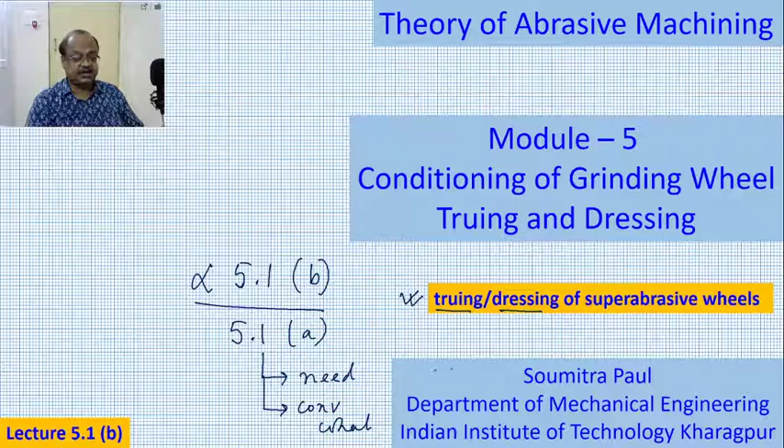In this particular 5.1b, we will be talking about truing and dressing of super abrasive wheel. Before we start, one thing I need to mention is that truing and dressing of super abrasive wheel is much more difficult and much more expensive, and that is one of the reasons the industry is trying to go in some other direction, which we have discussed earlier, but today it will reinforce the idea given to you earlier. So let us see how super abrasive wheels are trued or dressed.

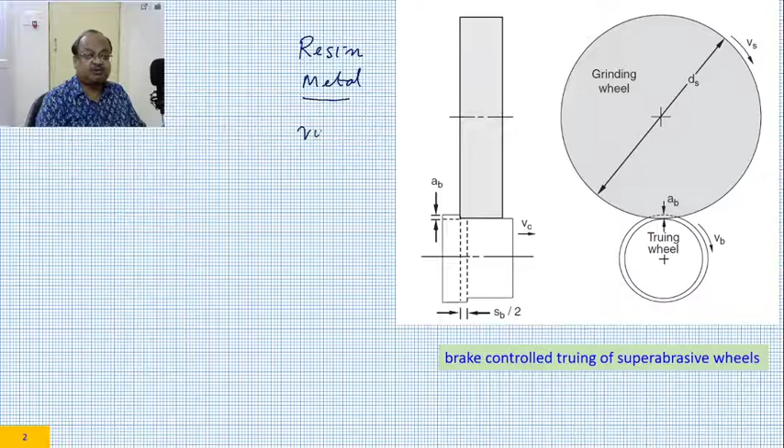Super abrasive wheels are typically resin bonded or metal bonded. However, you also have vitrified bonded only CBN wheel. So when we discuss typically super abrasive wheel, we will assume they are resin bonded. This is your grinding wheel and this is the truing wheel, typically silicon carbide wheel, and this is a sacrificial wheel.

During truing or dressing, gradually this diameter would go away, would reduce. So what is happening? This is rotating at Ns. This is not positively driven, meaning it is not mounted on any motor. This is simply mounted on a spindle. So as you go on doing the dressing operation, this is frictionally driven.

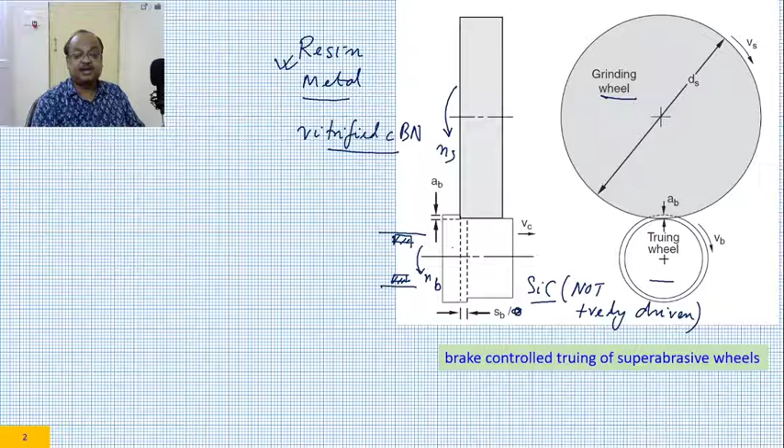However, on this side there is a centrifugal brake. So as the rotational speed of this brake controlled spindle increases, the centrifugal brake will enlarge and clamp on the brake shoe, and this VB and VS would not be the same. So there would be a slip velocity, and because of that slip velocity, there would be truing action or cutting action imparted by silicon carbide on this.

This silicon carbide would not be able to machine the diamond grits. What it would be able to machine is the resin bond or the metal bond, and by machining the bonds, it will try to remove the eccentricity. It will not do anything to the grits. The grits will become loose, the eccentric portion, and it will come out. So this is called brake controlled truing device of a super abrasive wheel.

These brake control truing devices are rather expensive. You have to have a silicon carbide wheel whose diameter goes on reducing very fast. So this process is time consuming and expensive. Let us see a video of brake control dressing.

So as you can see, I'll explain it. First, let us have a look at the video. The video is rather short.

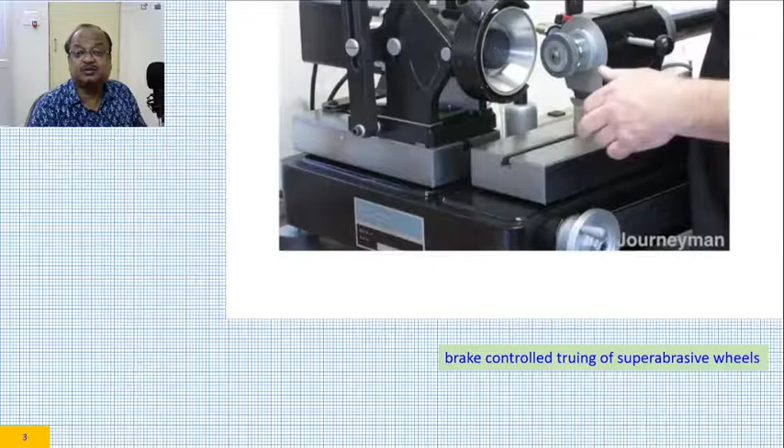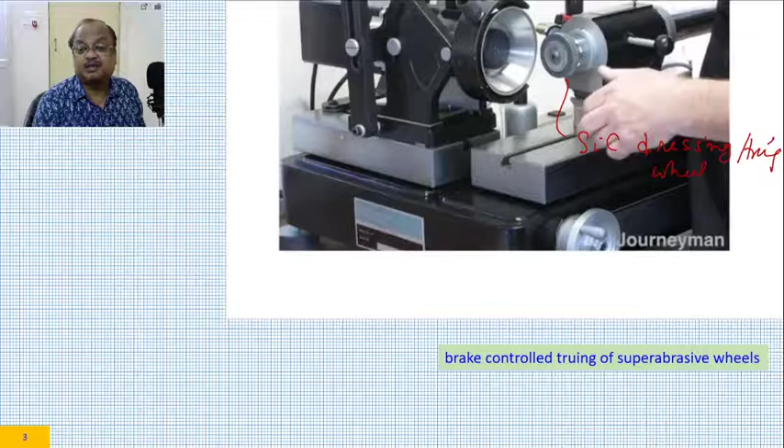At this stage, it is better to annotate. So this particular one is your silicon carbide dressing or truing wheel. This is mounted on this spindle. This spindle is not driven by a motor. Rather, the spindle is mounted on a centrifugal brake. We are truing the face of a grinding wheel.

This is the grinding wheel which is rotating in this particular direction. This is not rotating. When this is in touch, this rotates by friction drive and there is a brake control. So VS and VB would not be same. There would be a slip velocity.

Other than that, this has to be given a feed in this direction and it has to be reciprocated in this direction. So from this handle, this feed can be given and there is another handle with which this reciprocation can be given. In this way, the face of a grinding wheel, this is showing a face being trued.

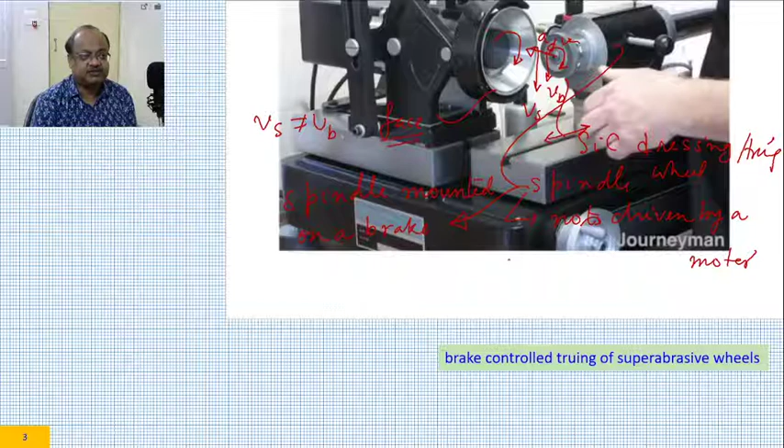Even the periphery of a grinding wheel can be trued. So this is a diamond wheel, possibly a metal bonded diamond wheel, which is being brake control trued, but it is not the periphery of the wheel, it is a face because it is a cup type grinding wheel.

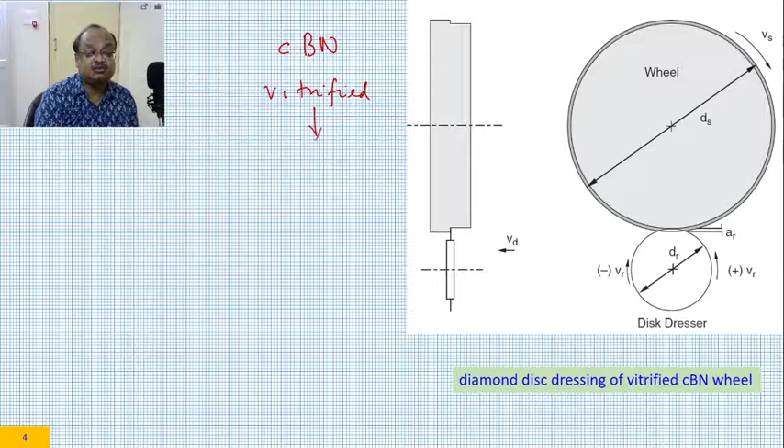What is the other? This is a particular dressing technique which is for CBN wheel. This CBN wheel is vitrified bonded. Vitrified bonded CBN wheels are rather easy to dress and that's the reason they are becoming popular. They are dressed with a diamond disc dresser.

This is the diamond disc dresser. This diamond disc dresser is positively driven. That means they are not frictionally driven. It is driven by a motor.

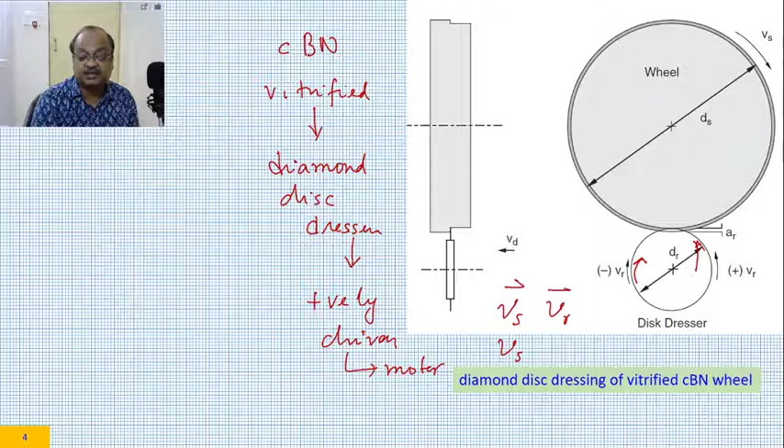And because it is driven by a motor, it can be either driven in this direction where Vs vector and Vr vector oppose, or it can be driven in this particular direction where the Vs vector and Vr vector are in the same direction. So this can be done, and there has to be a slip velocity which would enable truing and dressing.

This is the engagement. So this is Ar and this is moving in this direction with a lead of Sd, which will give rise to a velocity of Vd. And this Sd, please remember, is millimeter per revolution of the grinding wheel. It has got nothing to do with the speed of the dressing disc. So in this way, this kinematics is very similar to traverse cylindrical grinding, if you recall.

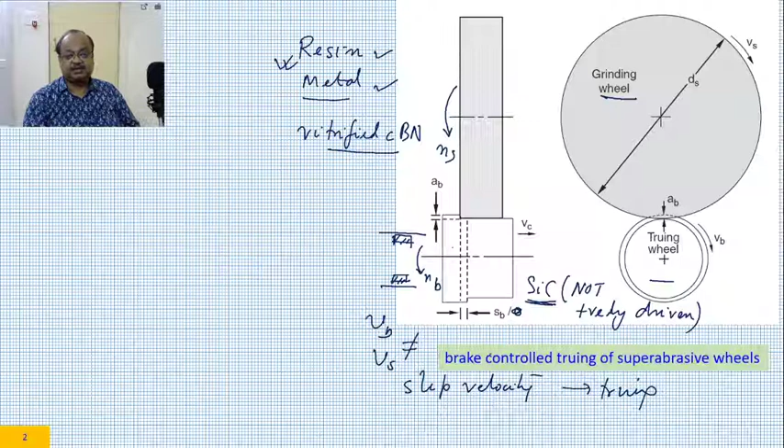So this is used. Now let us have a look at another one where dressing or truing of diamond wheel is done by a driven silicon carbide wheel. If we go back, this was not a driven wheel, this was brake controlled. This was the video of brake controlled dressing technique.

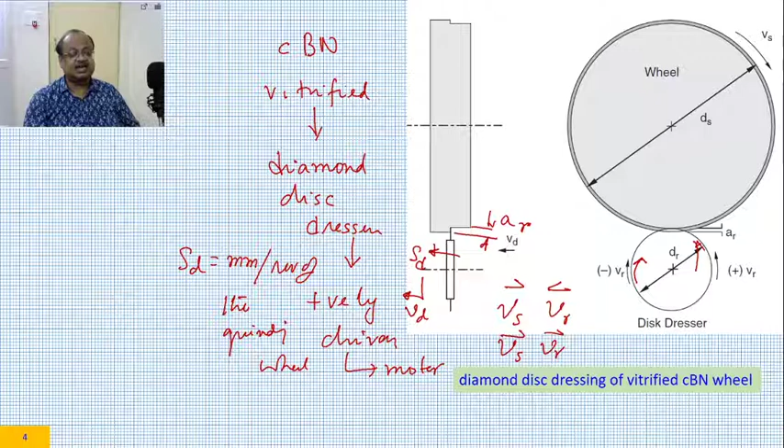This is a driven dressing technique of vitrified CBN using a diamond disc. However, diamond grinding wheels can also be dressed using driven wheels, but in that particular case, driven wheels or dressers are rotary silicon carbide wheels and they are sacrificed for dressing or truing the diamond wheel. Let us have a look at the video.

So this is dressing of a diamond wheel with a driven silicon carbide dressing wheel. This is once again a face truing operation.

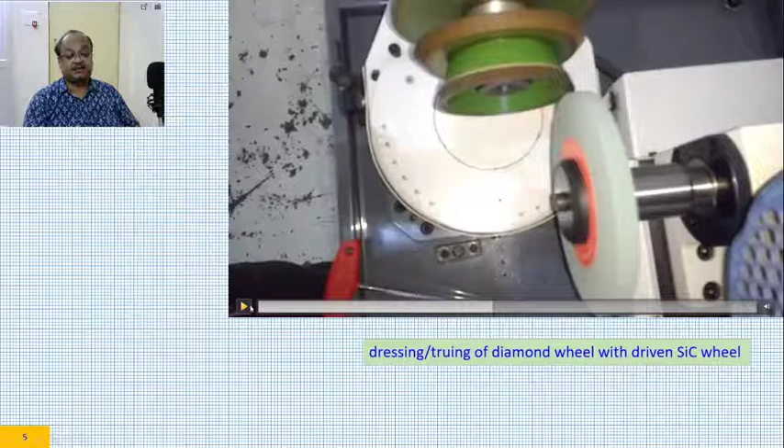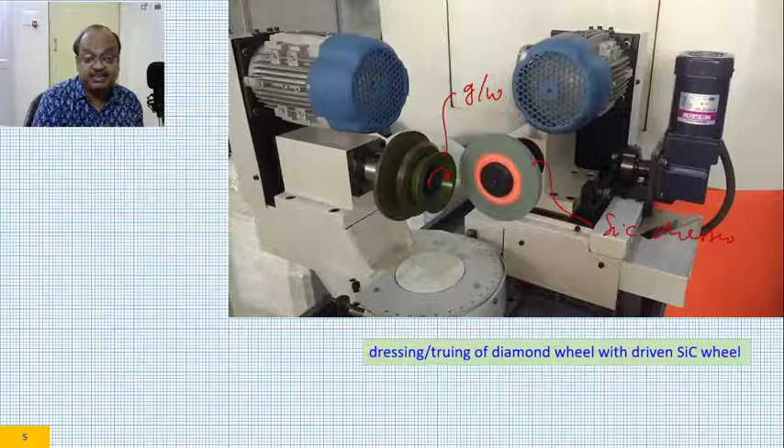Please look at the motions. What are the motions here? Let us annotate, then you will be able to see. This is the grinding wheel, and this is the silicon carbide dresser. This grinding wheel is rotating in this direction. This is being driven by motor 1, the dresser. The grinding wheel is driven by motor 2. So it can be driven either in this direction or that direction. This is NS, this is NR, the rotary motion of the dresser.

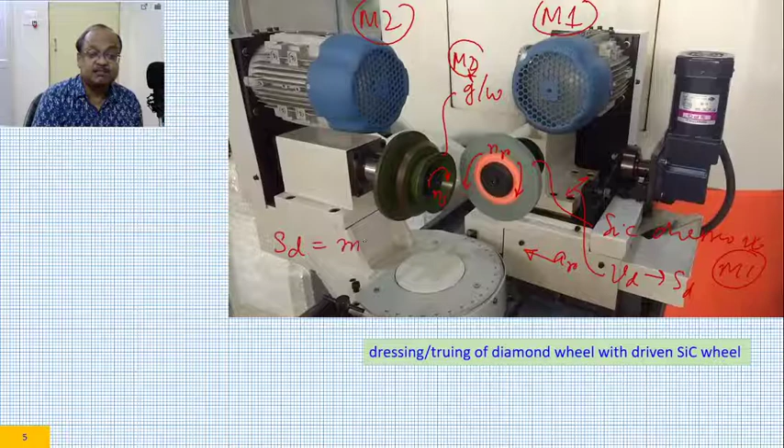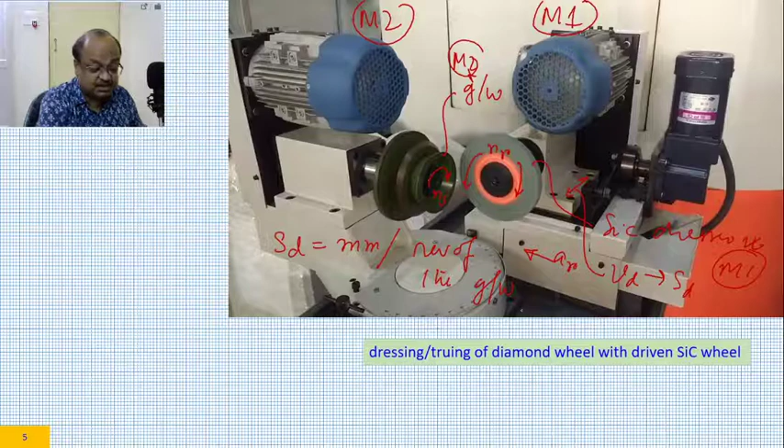Furthermore, this table can reciprocate, and this table can be fed in this direction to give AR. This reciprocation will give VD, which will lead to SD. Once again, SD is millimeter lead per revolution of the grinding wheel, not the dresser. That must be understood. So this is one way where dressing and truing of a diamond wheel is being done with a driven silicon carbide wheel. Driven means it is positively driven by a motor.

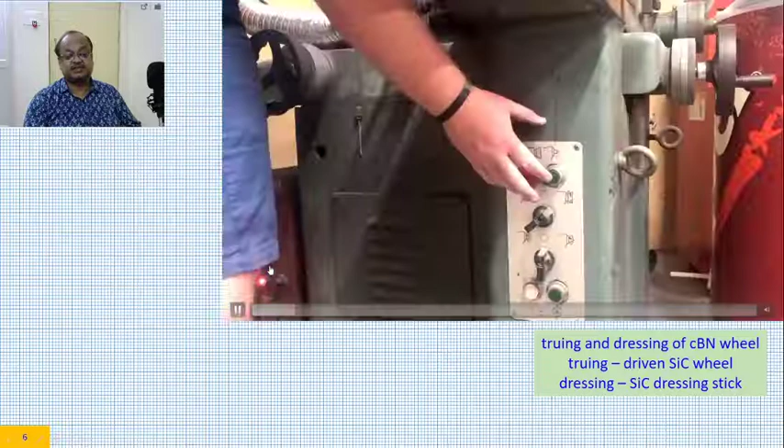So truing is being done with a driven silicon carbide wheel, very similar to the previous one. This video is coming from another source. So he is starting the motor, and you can see two wheels. One is a dresser, another is the grinding wheel. I think I will stop it here.

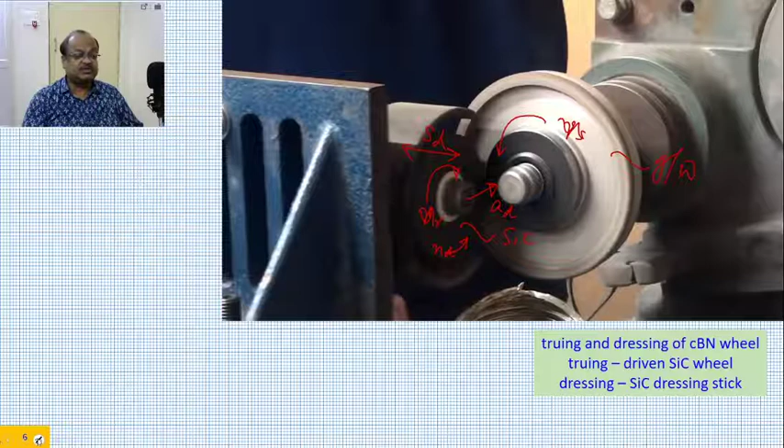Yeah, and I'll annotate a bit. So this is your grinding wheel, this is your silicon carbide dresser. This is rotating in this direction, this is rotating in this direction. This was reciprocating, and there must have been an AD in this direction. So this is SD, this is AD, this is VS, NS, NR, and this NR could have been in the other direction as well - that possibility was also there. I do not know how to get rid of this annotation. Erase all, then we can go back to the video and have a look.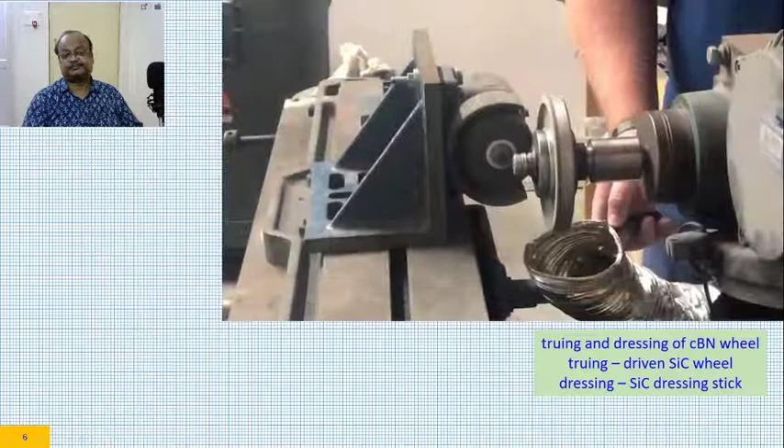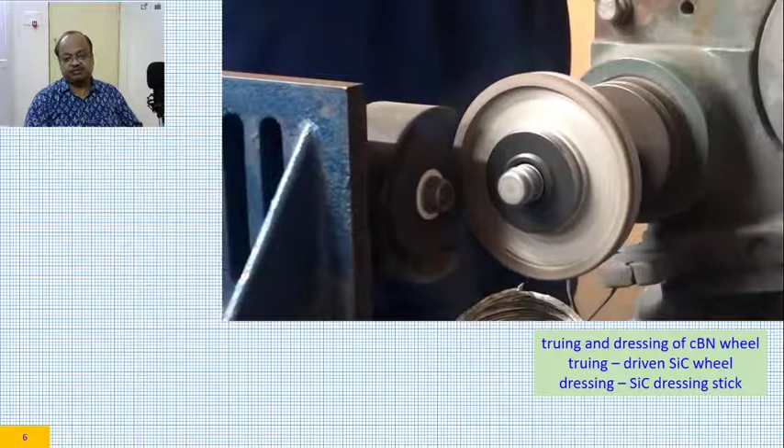So he is not dressing, he is truing it, and after that the dressing will come. During this truing process, the dust coming out is not much, and this is what I am calling glazing. After this truing, as you can see, the grinding grits are no longer protruded enough to participate in the cutting operation. So dressing has to be done so that it becomes open. Let us continue - so this is a glazed wheel, what we call a glazed wheel.

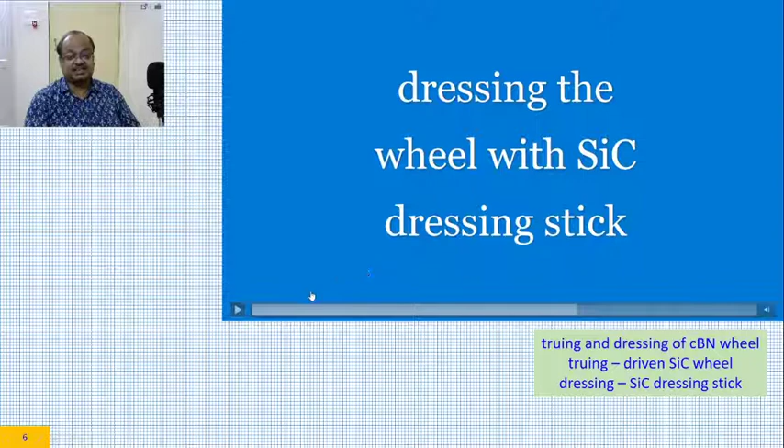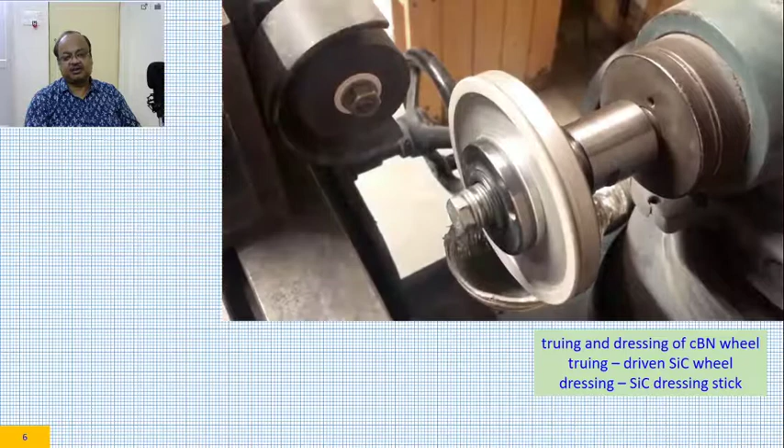So now it is dressing of the CBN wheel with a silicon carbide dressing stick. They are using a dressing stick for doing this. Several passes are required. This is the silicon carbide dressing stick that he is holding with his hand and rubbing against this so that he can eat away the bond material, and gradually the grits are exposed and it becomes sharp.

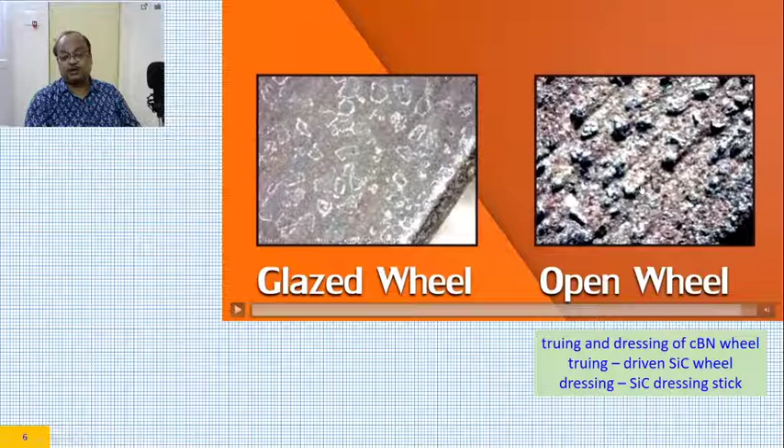So here, as you can see, the same wheel, the grits have become exposed, and now it is open and you would be able to form chips - proper grinding would be possible. The last one is interesting. We not only do grinding on flat surfaces, we also do profile grinding. So for profile grinding, once the grinding wheel has been manufactured, it has to be provided with a profile, and providing a profile on a superabrasive wheel is the most time and resource consuming activity. Let us see how it is being done.

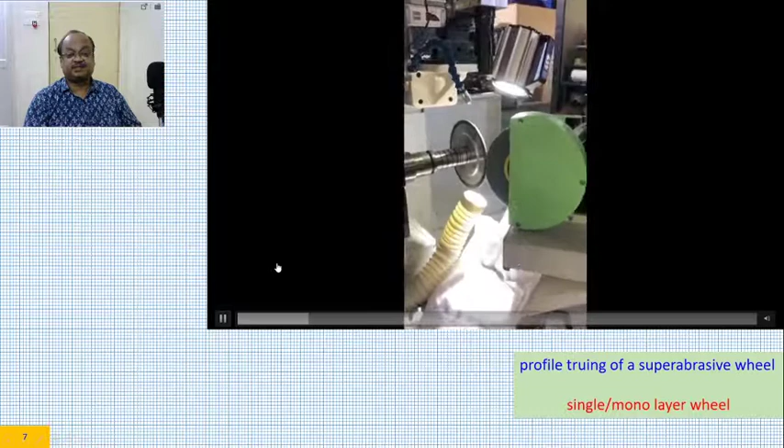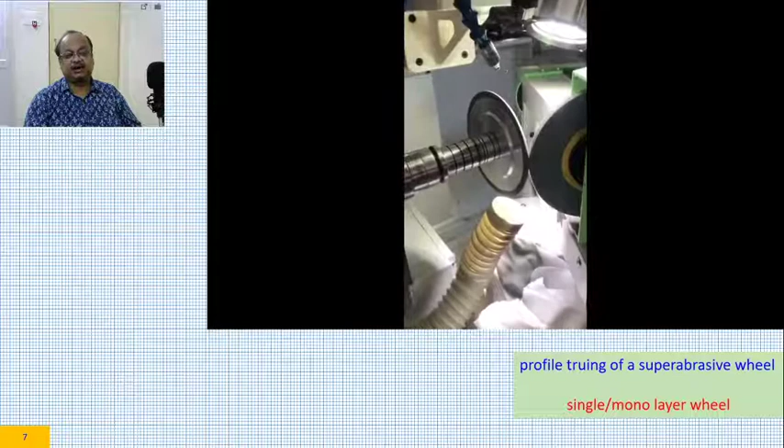Here it is being done by a rotary dresser, once again a silicon carbide dresser. By now you have understood which one is the dresser - the one which is reciprocating is the dresser, and gradually it is trying to impart a given profile which is being projected on a computer screen taken by a camera. This is a very tedious process. This can take hours to provide the full profile geometry.

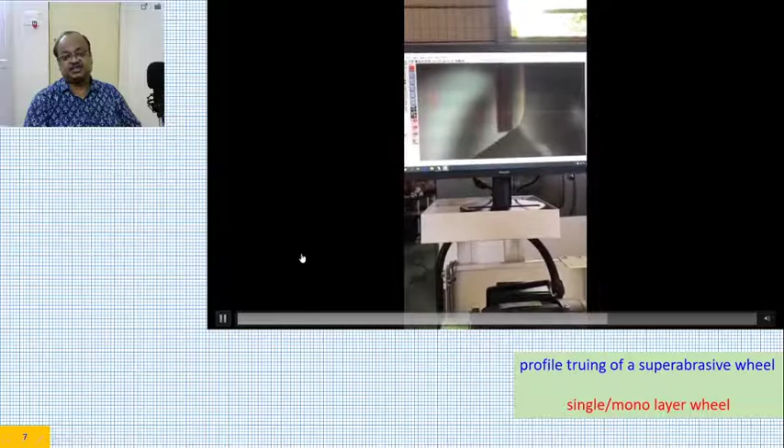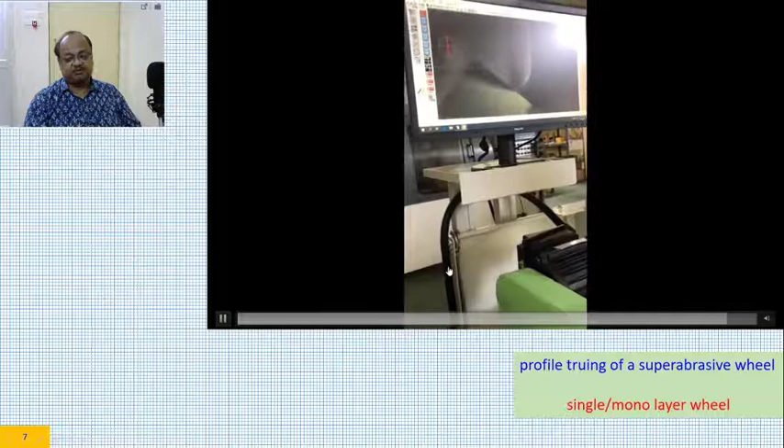This is a very, very tedious process, and this way the truing is being done. Once the truing has been done, then dressing has to be done on the same wheel, and this being so time consuming and resource consuming, this particular methodology is not becoming very popular, or it is becoming less popular day by day. This has given rise to the use of single or monolayer grinding wheel, because in case of a monolayer grinding wheel, this particular shape can be obtained by turning operation, and on that you can simply embed a single layer of grinding grits very easily. I have not explained the technology of it, but at least theoretically I have explained the possibility.